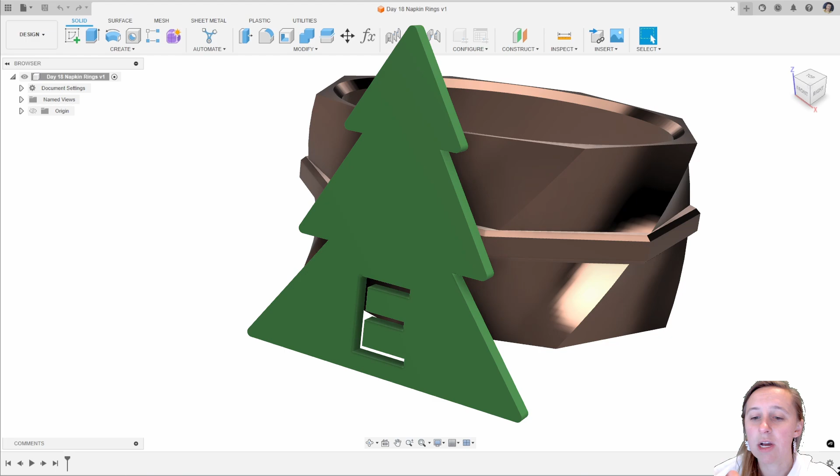For day 18, we are designing these custom napkin rings that you can use for your Christmas day. The idea being we design a little interchangeable tree that you can pop in and push fit into the napkin ring, giving you customizable table decorations for Christmas day. If you want, you could design something different to go with the napkin ring. So let's jump into Fusion and get started.

So jumping into Fusion, let's get started. I'm going to start off by creating a new component, and this is going to be called Napkin Ring.

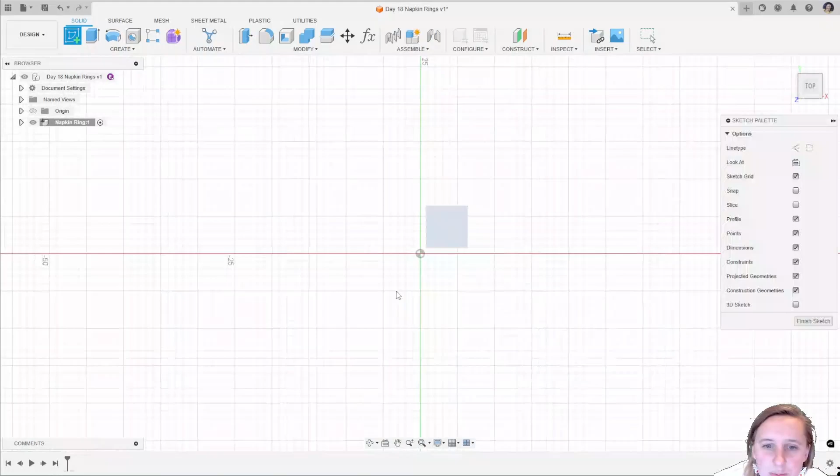I'm going to start off with a sketch on the XY plane. I'm going to use the polygon tool, the top one, and just drag that out. I want that distance to be 20, and I want the number of sides to be 8 in this case. I'm just going to add a horizontal and vertical constraint to that top there, just to give us a fully defined sketch to start working with.

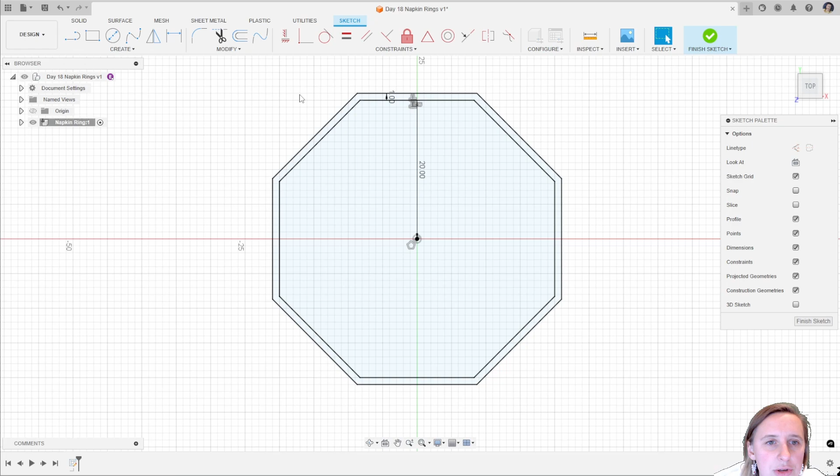I'm going to use the offset tool and do a 1mm external offset, and we'll come back to using that in a moment. Then I'm going to do a second offset, an internal one of -1.6mm, and I want this one to be a construction line. So changing that line type over to construction and clicking OK. If you forgot to do that, you can select all the lines and then change them to construction afterwards.

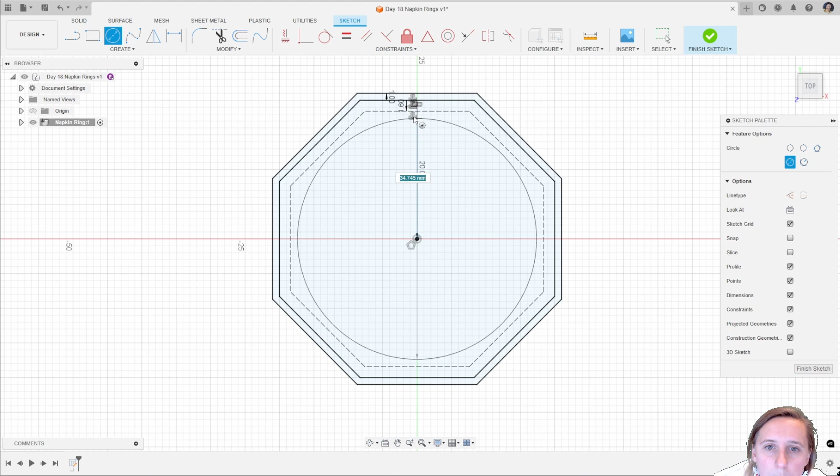Adding in a circle, turning off that construction, and bringing that up to the outer of the octagon that I have there. Then finishing that sketch and adding a new sketch on the XZ plane.

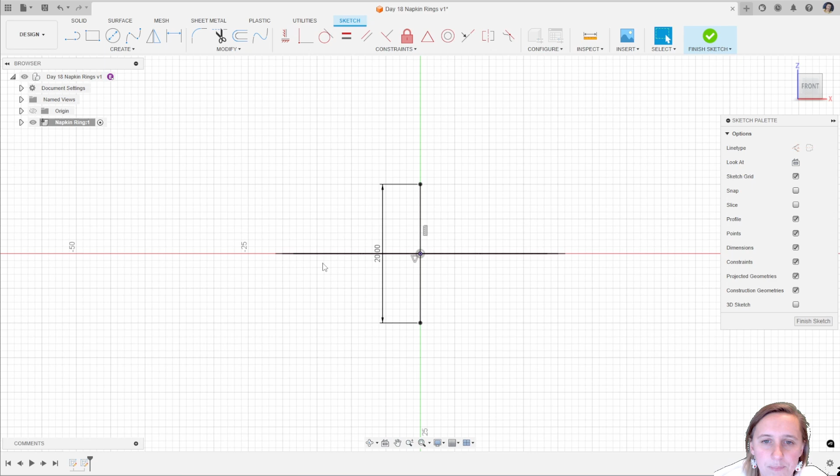Selecting that plane and drawing a line. I want the distance of that line to be 20mm. I'm then going to use a midpoint constraint, that's the triangle, to the origin point, just to fully define that sketch. You also want to make sure you added that horizontal vertical constraint. If you didn't quite get yours at 90 degrees, you can add that in using this constraint tool up here. Once you've done that, click Finish Sketch.

I'm then going to create a sweep. So create and sweep. I want to select that inner profile, the octagon with the circular interior, and the path for that is going to be that second sketch there. Now to make this look quite pretty, I'm going to add in a twist angle of 45 divided by 2. So there is a very basic napkin ring, and you could print this off at this stage if you wanted to. However, we can make it a bit better than this.

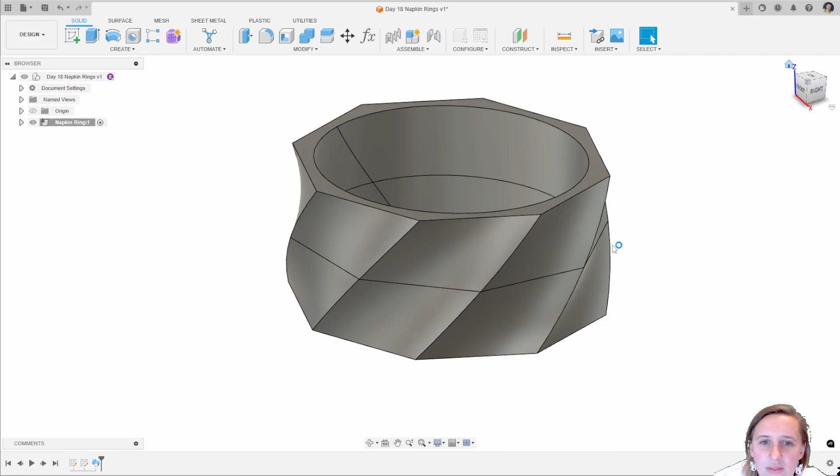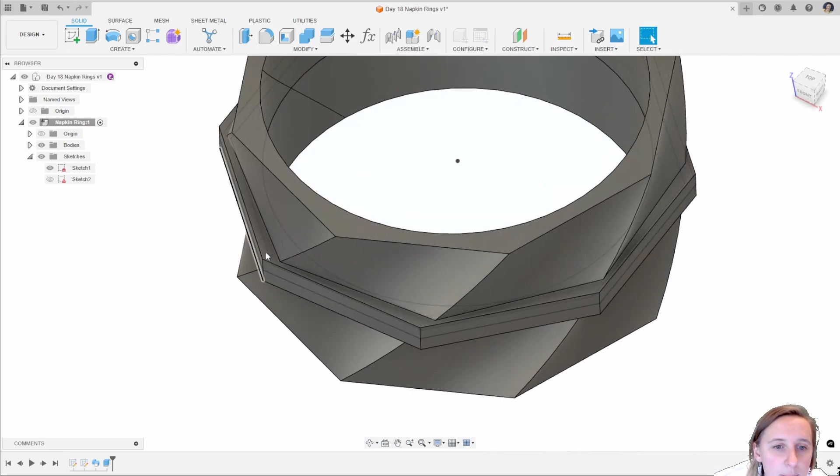I'm now going to create an extrude using that first sketch that we did. I want to select both of the profiles, so you can hide the body to do this. Selecting both profiles, I want to do a symmetric design, using whole length, 3mm, but I don't want to cut this, I want to join it to this object. The reason we select both profiles is because in some areas with that twist on the sweep, we would end up with some gaps.

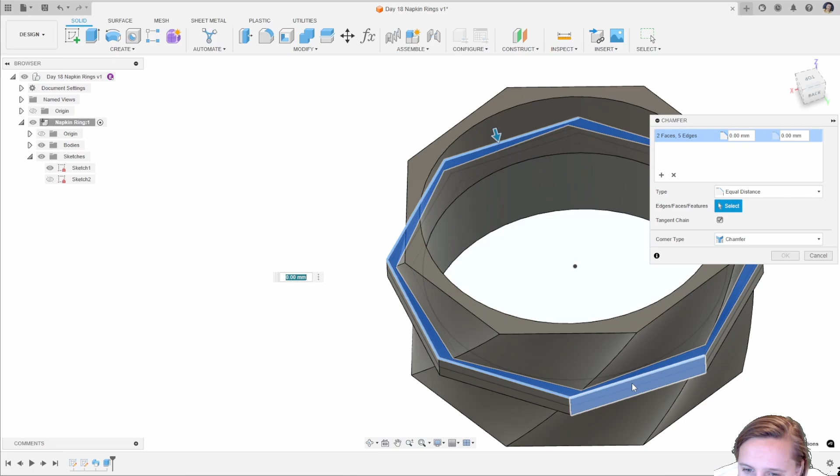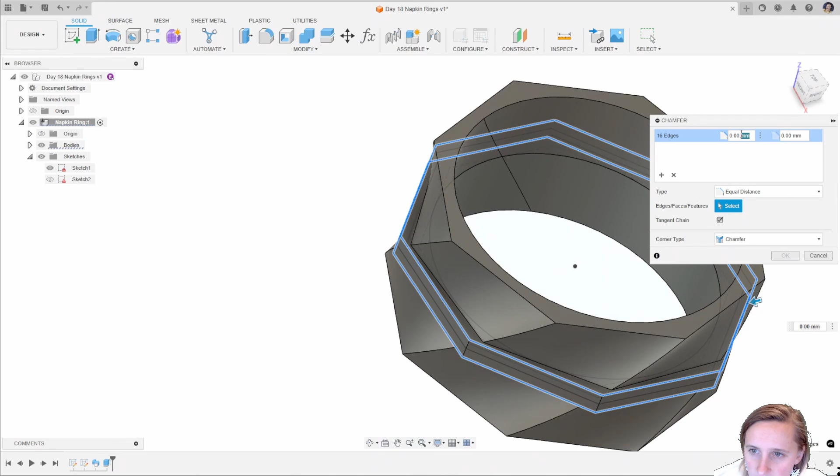Then going to go in and bevel the edges, so modify and chamfer. I want to grab all 16 of the edges around the octagon that we've just extruded. So I don't want that one, let's start that again. Grab all of those edges around the octagon extrusion that we have just created. You should end up with 16 of these once you have selected each one around there. I've got 16 and I want that to be a chamfer of 0.5mm. You can just see that that bevels all of those edges on the design.

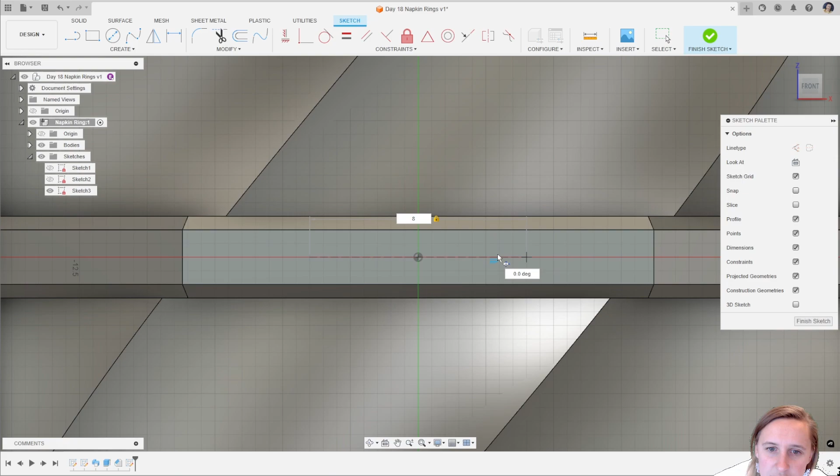Going back to the home view, I'm going to create a sketch on that front octagon edge there, and I'm going to use the ellipse tool. Create, then ellipse, grab that origin, just drag your mouse outwards, and the first dimension is going to be 8mm. I'm going to click once and then just move my mouse down and enter a dimension of 4 there, and this gives you a fully constrained ellipse.

I'll finish that sketch and create an extrude. I'm going to make sure I've got all 3 of those profiles of the ellipse and drag that through to make sure I'm cutting all the way through the part. So 4 or 5 millimeters should do that for you.

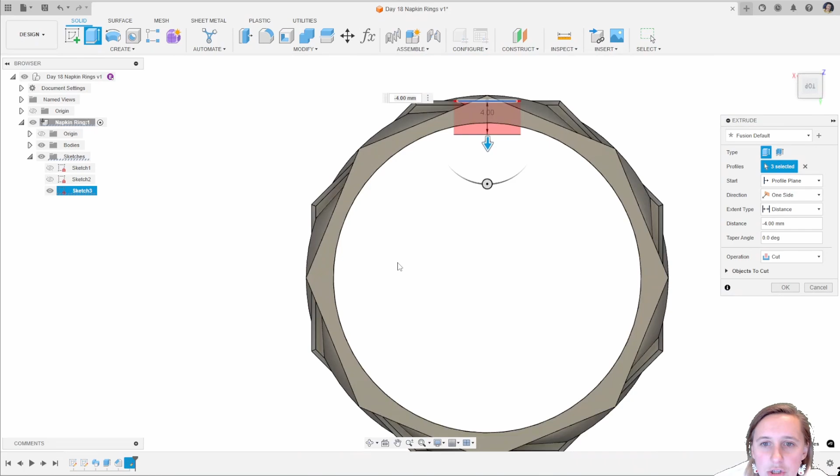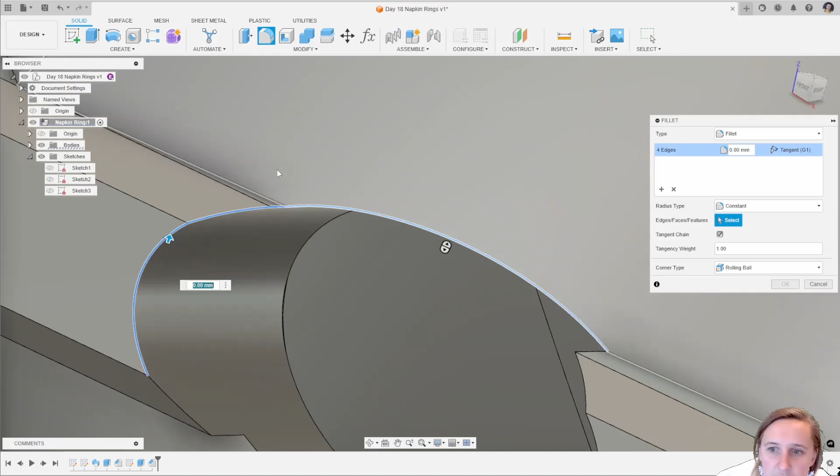Clicking OK, I then want to add a couple of chamfers and fillets just to smooth off those edges. So create a chamfer, and this one is going to be 0.2 millimeters. Then I want to fillet these inside edges, so create fillet and make sure I click each one of these, with tangent chain ticked in the fillet options. Coming all the way round, making sure we get each one of these edges.

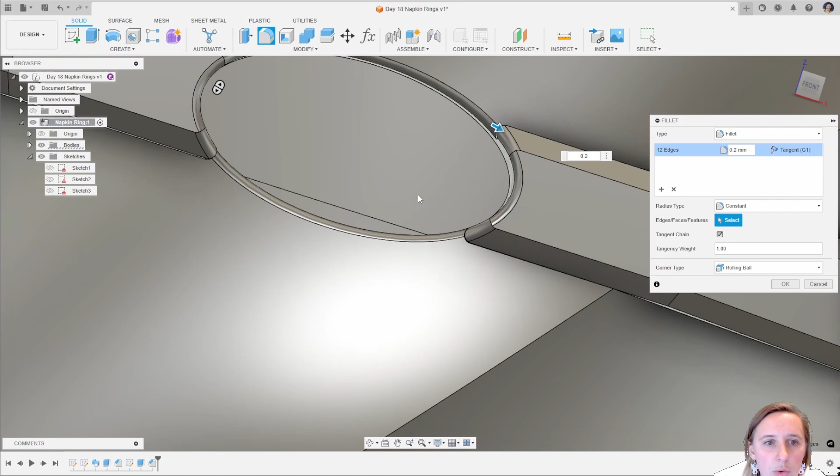You should have 12 in total, and that again is going to be a 0.2 millimeter fillet. Just check that and make sure you're happy with it before clicking OK. That fillet smooths off the edge, which will help with the insertion of the customized tree piece that we're going to put in.

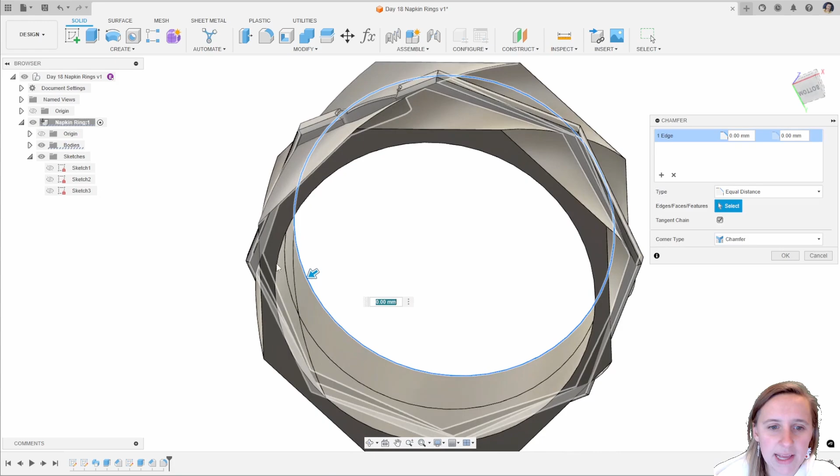The last thing to do for the napkin ring is to add in one final chamfer, on this top edge and the same corresponding side on the bottom, a 1 millimeter chamfer. That gives it a nice internal slot for popping the napkin through the ring. And that there is the napkin ring.

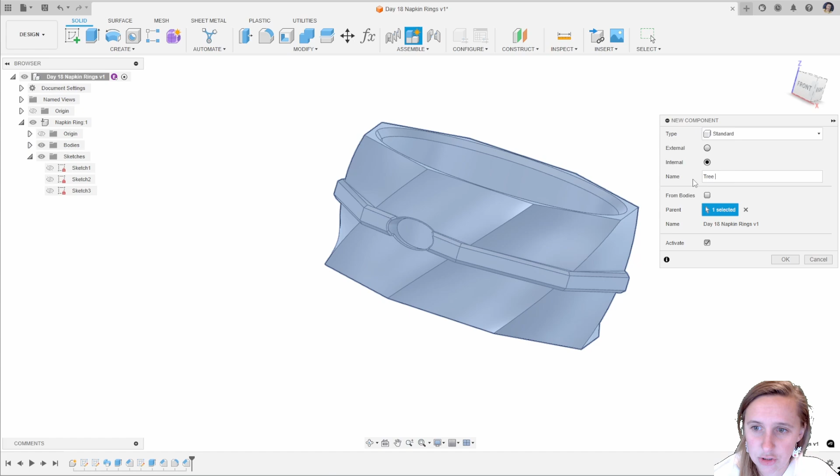We're now going to move on to the customizable section of this design. Activating my top level component, I'm going to click new component, and I'm just going to call this Tree Letter — entirely up to you what you call this part. I'm going to do a Christmas tree design, but watch this through and you could come up with a different design. The key bit is to do this customizable section, so we can pop initials or a small name on there if you want to.

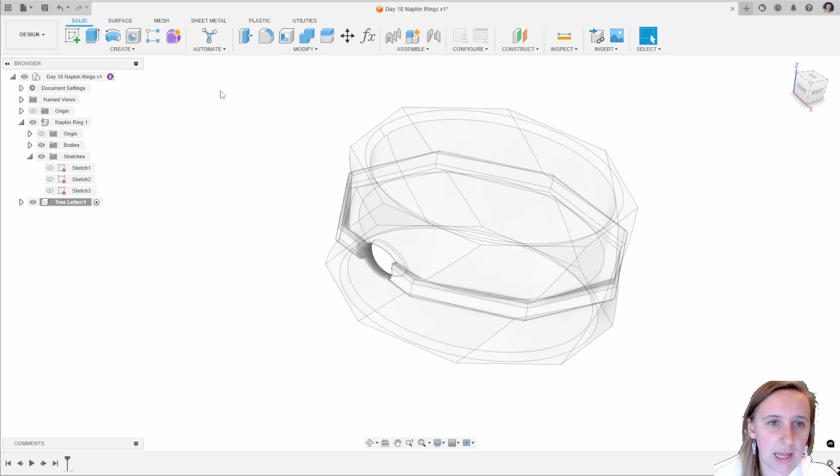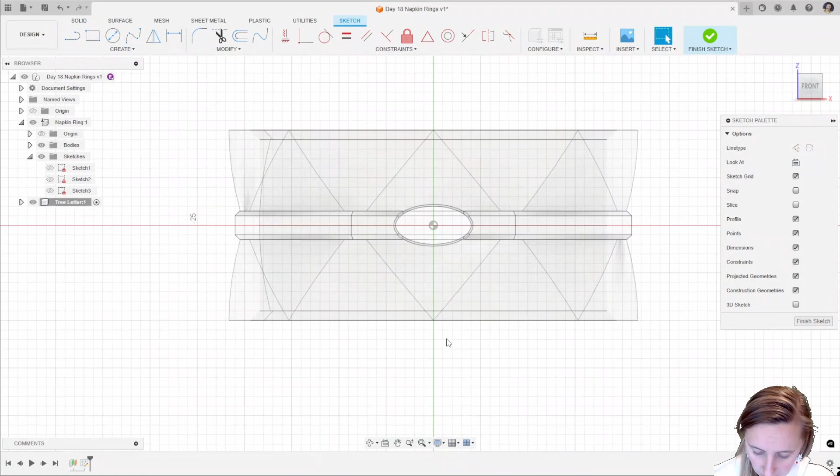So I'm going to create an offset plane, constructing it from our XZ plane, out -22 millimeters, just off the front. This gives me a basis to start the design for the customizable piece. I'm going to create a sketch on that new construction plane, and this is going to be the tree design.

I'm just going to get started and give myself a basic outline of the tree, and then I'll add in the dimensions. I want the overall height of the tree to be 35 millimeters.

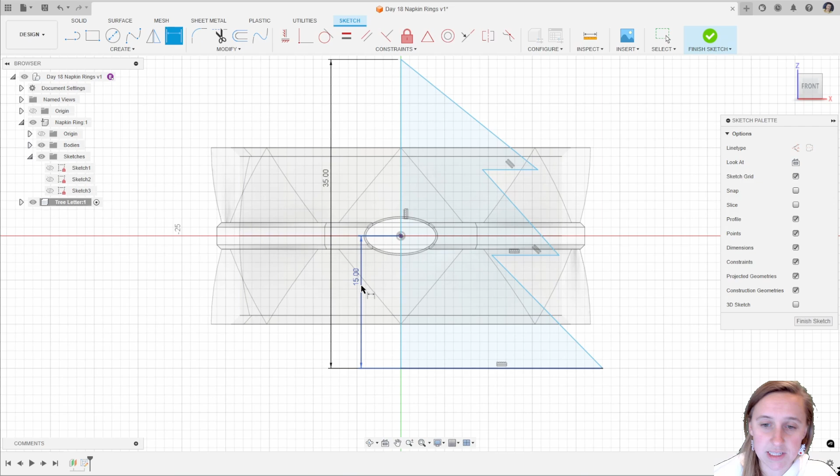I know that I want the bottom of the tree to this point to be 15 millimeters. This is the area where you're going to put your text, which is why it's not centered around that point. From here to here is going to be 12.5 millimeters, and from here to here 11 millimeters. I just want to make sure that line is coincident with the origin, around that area.

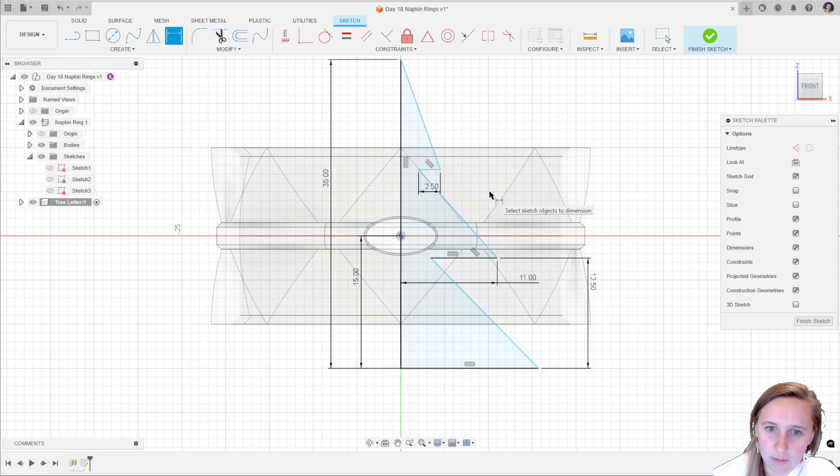I'm going to make this one 2.5 millimeters, and this one 4 millimeters. You can see we're starting to define this sketch here. I'm going to make the overall size of the tree 16.5.

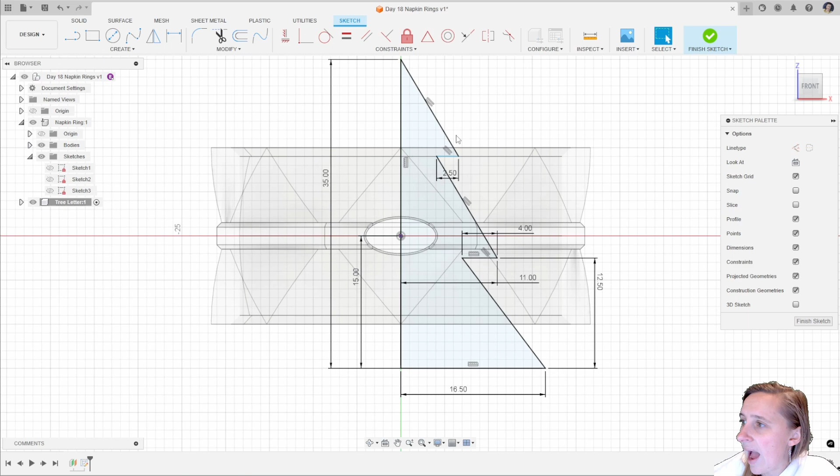Then I'm going to make these two lines parallel using a parallel constraint, selecting both and clicking parallel. I also want those two lines to be equal length, so selecting both and saying equal. And that there is a fully defined sketch that you can use for your Christmas tree.

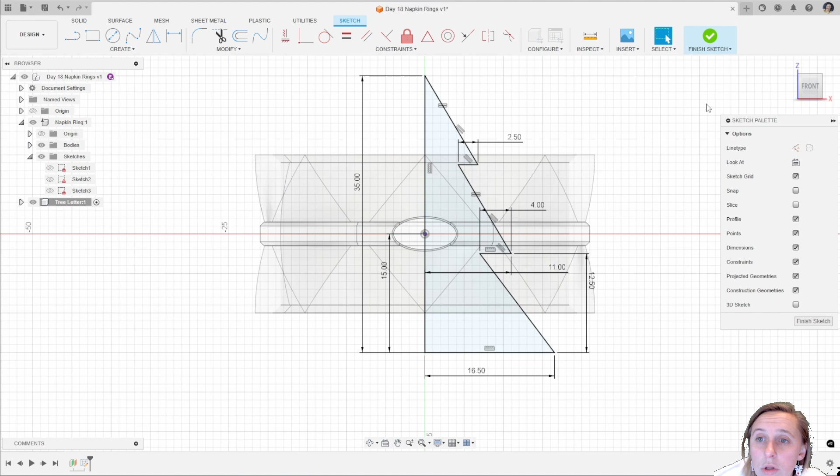I'll just reposition the labels, and you can use those to set your dimensions if you're doing the same design as me. Once you've got that, click Finish Sketch, and I'm going to do an extrude of that. I want the extrude to go in this direction, -1.5 millimeters, to give that object there.

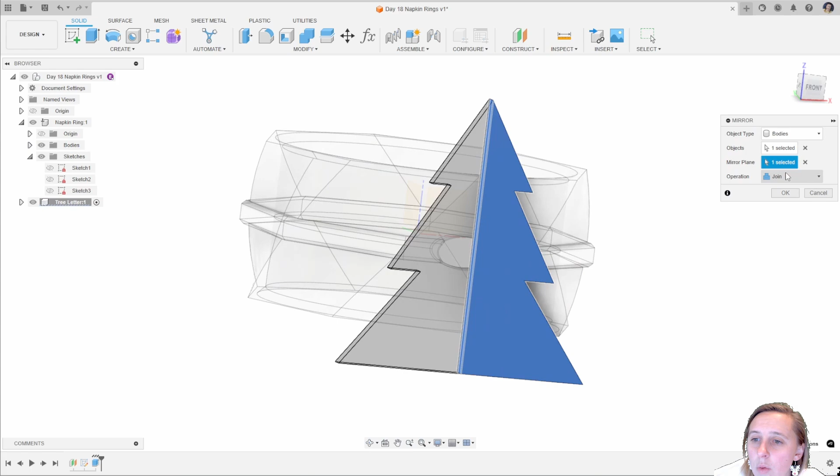I'm then going to create a mirror. Now you could have mirrored in the sketch, but it's always better to mirror your objects. The mirror plane is going to be the center of that, and I want the operation to be join, so it creates one joined component.

I'm then going to add fillets to each of these. So add, then fillet, and I'm going to do each of the points of the tree. So we should end up with 7 edges on this operation.

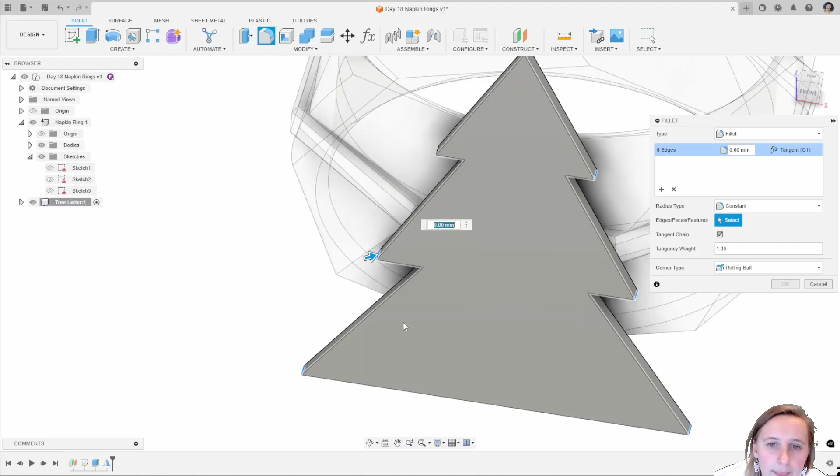Clicking each of those, and they're going to be 0.5 millimeters, just to create a rounded tree shape.

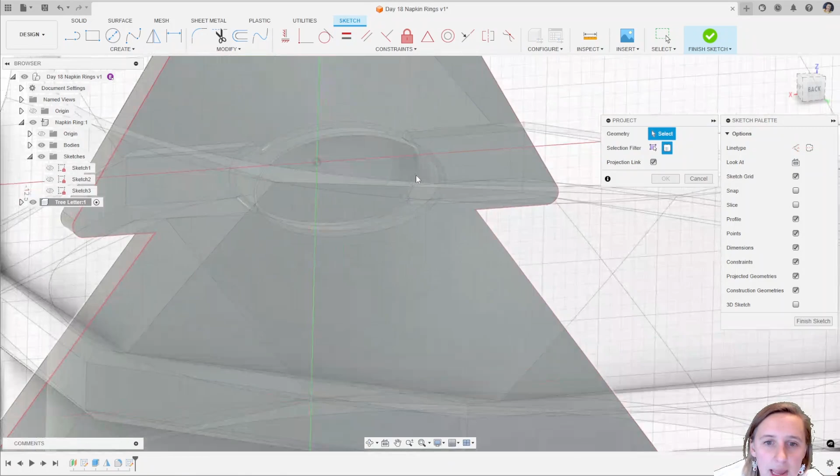Now I want to make the connection piece that's going to insert into the napkin ring. So I'm going to create a new sketch on the back plane, and I'm going to project through the inside of that ring of the napkin, the inside of the hole. So I'm going to do that edge and that edge, the internal edge before the chamfer on the napkin ring, and click OK.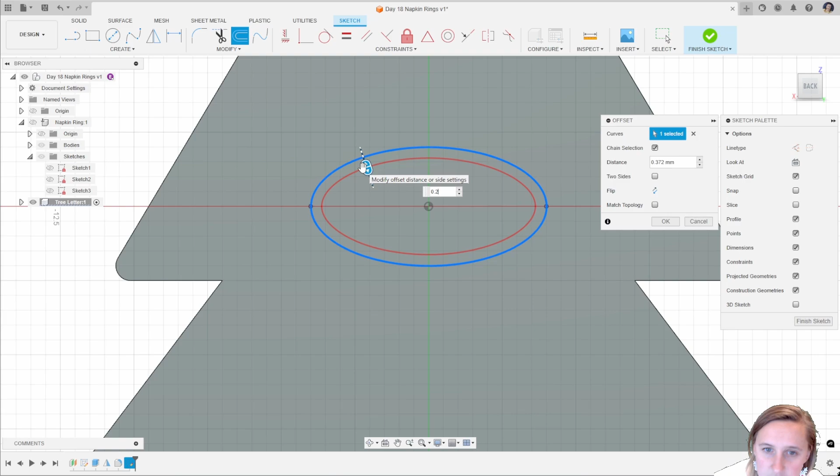Then I'm going to turn off the napkin ring visibility so I can work with this sketch. I'm going to use the offset tool, and I want my offset to be 0.2 millimeters inwards from that edge. So the purple line is the projected line, and I want an offset of 0.2 millimeters.

I'm then going to extrude that smaller profile out, and I want to extrude it 4.4 millimeters. Now you could turn on the napkin ring to make sure you are going far enough into the design.

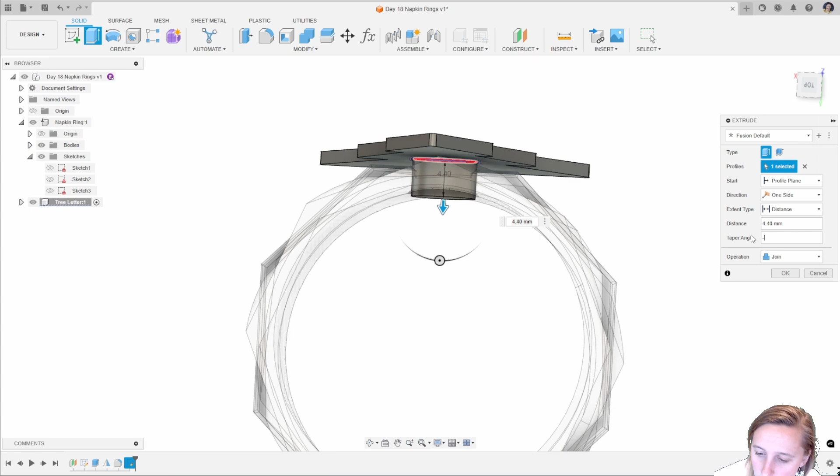Now, to make sure this isn't too tight going into the design, I'm going to add a negative taper angle of 1.5 degrees, and you can see which way that's going. So I definitely want to go inwards, which is negative, so negative 1.5 degrees for that taper angle. And I want my operation to be joined there.

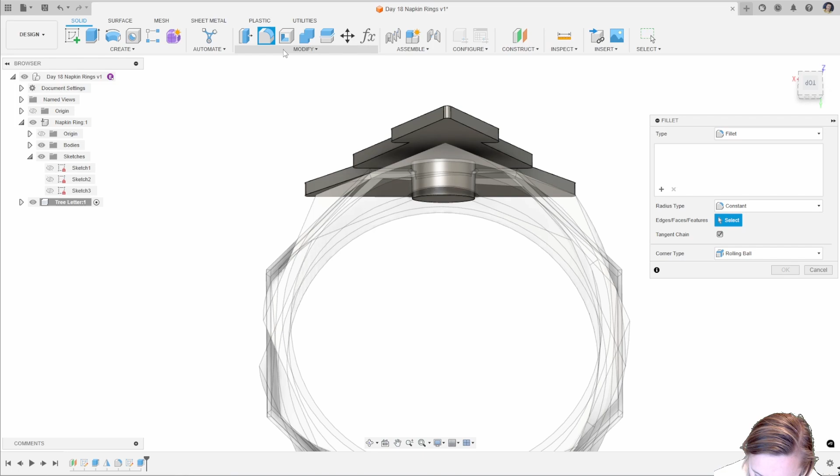That's just going to give us a little bit of clearance when we're inserting this part into the napkin ring. And then I want to add a fillet to the edge there just to round it off, and that's going to be a 0.2 millimeter fillet.

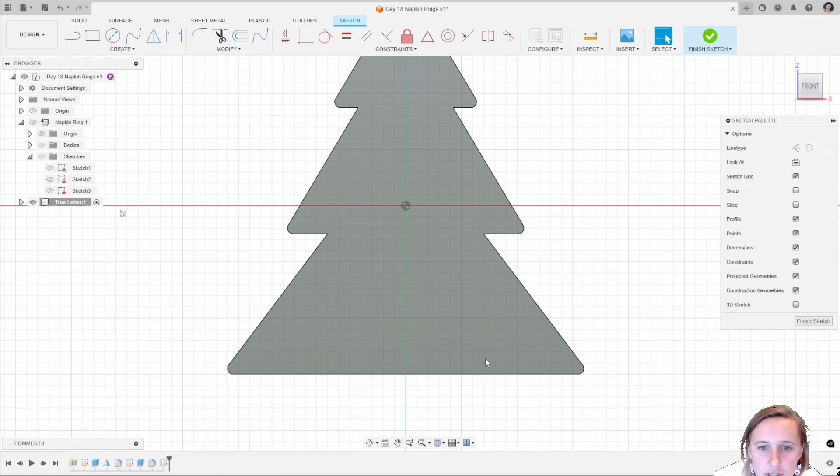Now I'm going to turn off the napkin ring again, just so I'm working on just this design. So I want to add in my customization here, and this is what you can choose what you want to do. So I'm going to create a sketch on the front plane, and I'm going to use the text tool, and I'm just going to create text and draw the square where I want it to be.

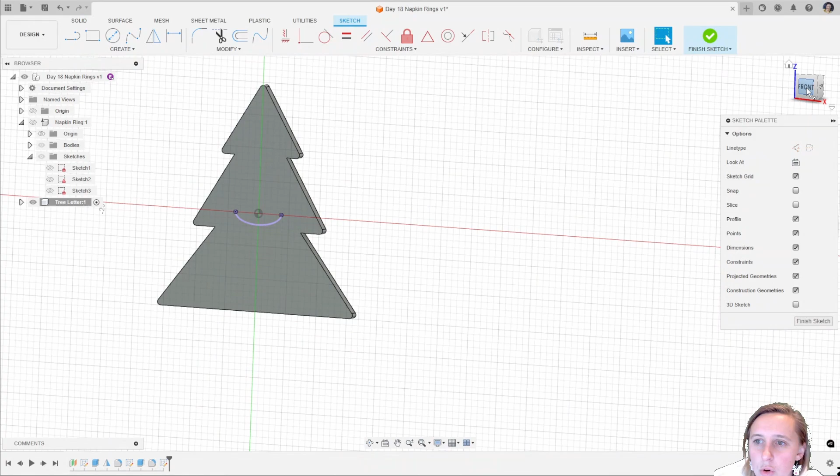Now I want to make sure that I'm not extruding over the insert piece, so I'm actually going to use project first. So I've got that text there. I'm just going to click cancel. I'm going to project, and I'm going to select that bottom line of the part and just project that through to my sketch, so I make sure any text I do does not overlap or go above that part where I've got the connection piece.

So let's try that again. Create text, and I'm just going to draw the box there, and I'm just going to put a letter E, but you could customize that for whoever you've got coming for Christmas dinner. Make it as big as you can without going too near the edge of the design. I'm just going to center that up.

Now you're not going to be able to fit too many letters in here, but you could do a couple of initials, maybe a really short name there. And I'm going to click finish sketch with that one.

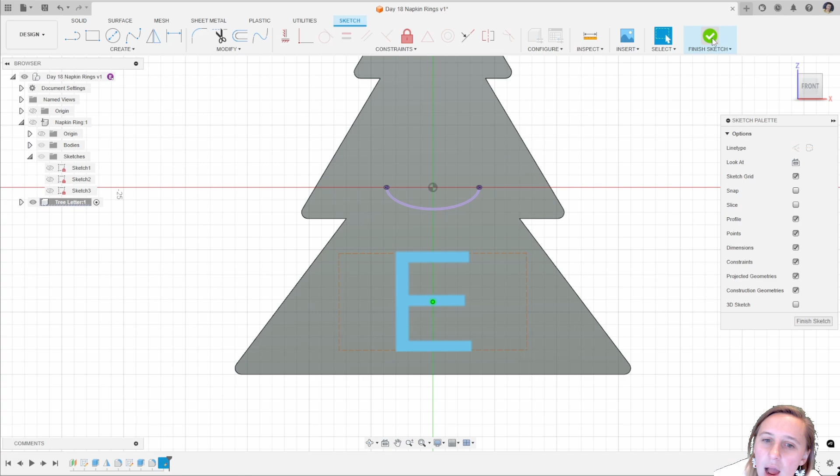I'm going to extrude my text through. I'm going to go extent to object and click the back. And the operation there is going to be a cut, which gives me a nice letter E inside, cutting through the design.

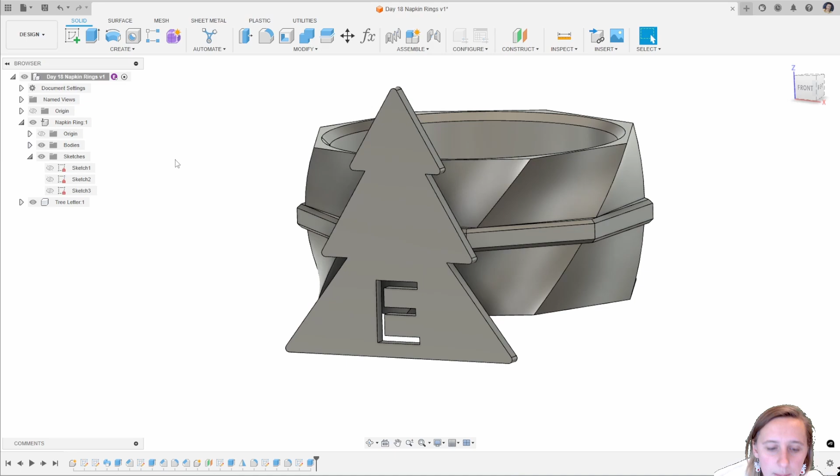And that really there is our customizable napkin ring. I'm going to add in a couple of appearances. A on the keyboard is my shortcut for appearance. I'm going to add gold for the napkin ring, and then I'm going to add in a green, so I'll use plastic matte green for the tree. And you can customize this based on who you've got coming to dinner.

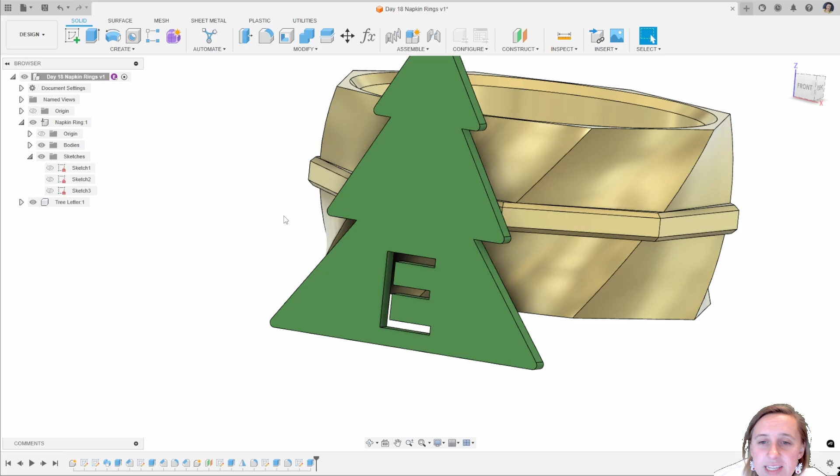You could use them as place cards for your design. All you've got left to do is export your STL files, load them up into your 3D printer and print them out.